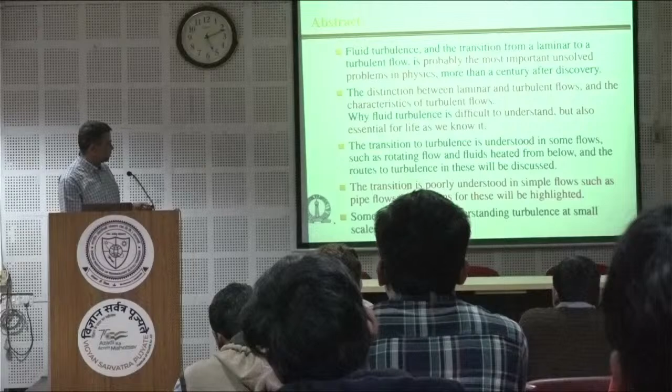What I'll try to accomplish today is to say a small number of things: that fluid transition from laminar to turbulent flow is probably the most important unsolved problem in physics, more than a century after its discovery. We still do not understand well the distinction between laminar and turbulent flows, and I'll try to tell you why it is difficult to understand, but more importantly, why it is essential for life as we know it.

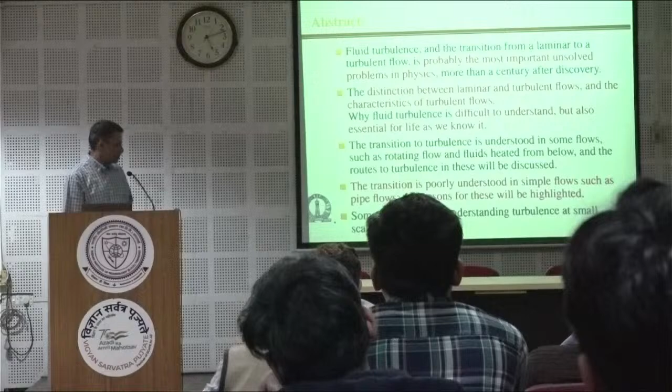There are some flows for which we understand that the transition starts from an instability, and there are certain routes to turbulence. But for flows that are common every day, the transition in pipe flows, for example, is still poorly understood. There are reasons for this, and I'll go through that - more as a motivation for you to join in and try to solve this difficult problem in your own ways. I'll discuss some of our work at the end.

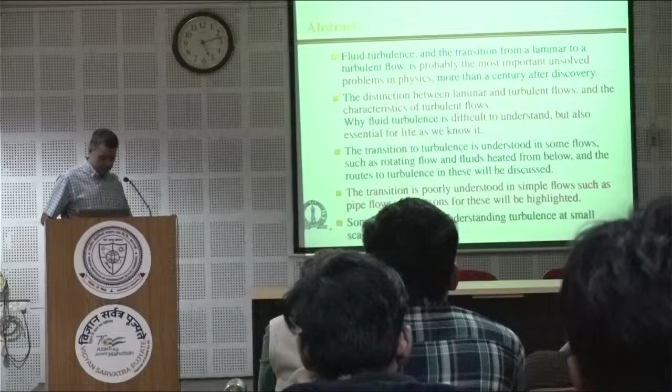So transition is something we see every day. We see it when you open a tap - at the top there is a nice laminar flow with smooth streamlines, and at some point it breaks up into a turbulent flow.

If you open it further, you see that the flow is chaotic with velocity fluctuations in all directions. This transition happens spontaneously. There's no need for an external disturbance, no need for a continuous disturbance, to generate a turbulent flow.

You see it in water, you will see it in air as well. At low velocities, the smoke is like a straight wisp, and then it breaks up into turbulence. It's seen in all large structures. So I'll try to explain laminar and turbulent flows, what turbulence is, and why we have turbulence.

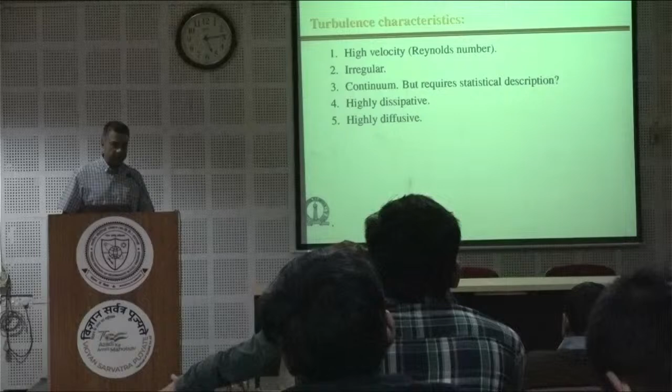Turbulence has various characteristics. It happens primarily at high velocities, measured by the Reynolds number, and it's highly irregular. The point is that turbulence is still a continuum phenomenon, in the sense that you do not need a molecular description to get turbulence. So the smallest scales in turbulence are still much larger than the molecular scale. And it's highly dissipative and highly diffusive. I'll try to illustrate that.

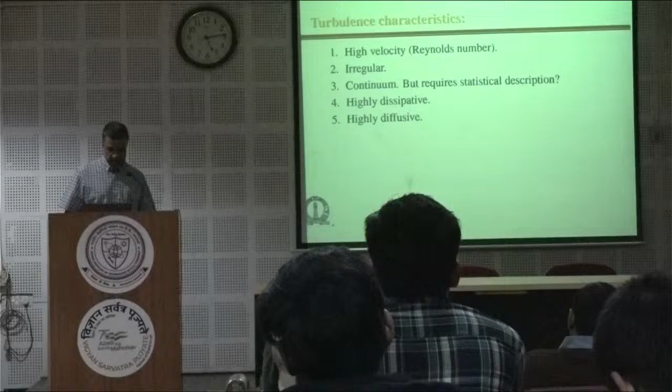If you take two plates and shear them past each other, the force exerted is directly proportional to the area, inversely proportional to the separation, and directly proportional to the velocity. If you write force per unit area, it has a constant times the velocity divided by the length. The velocity divided by the length is called the strain rate, and this coefficient is called the coefficient of viscosity. Using this coefficient of viscosity, you can make a dimensionless group called the Reynolds number.

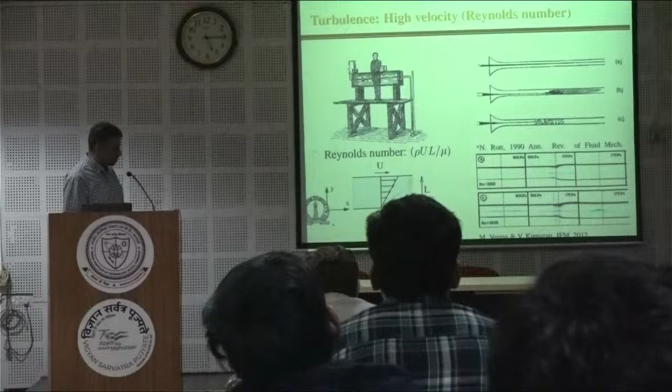When this exceeds some critical value, you get a transition to turbulence. This is shown here by experiments by Reynolds many years ago, where at low velocities you get a nice straight line. At some point, there is a discontinuous transition to a highly turbulent state. These are some pictures that we took in our setup that show the same thing.

The transition Reynolds number is usually in the range of 10 power 3 to 10 power 4 in most situations. It depends upon the configuration. But in all cases, you will get a transition from a laminar state at low Reynolds number to a turbulent state at high Reynolds number.

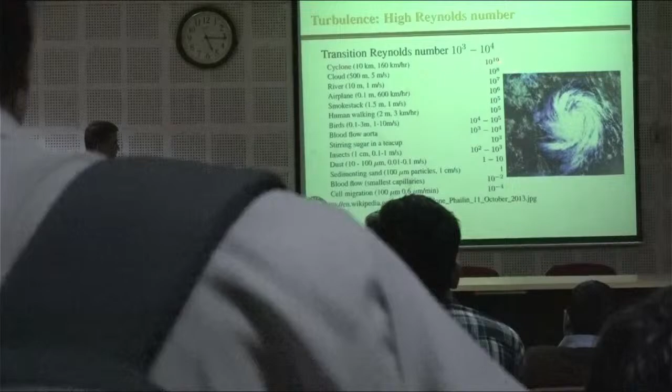In our everyday life, we encounter things of various Reynolds numbers. Starting from the large scale, cyclones going at 10 kilometers diameter and about 160 kilometers per hour have a Reynolds number of about 10 power 10 or so. Clouds and rivers, etc., have about 10 power 7, 10 power 8. What we usually encounter in airplanes is about 1 million or so.

Smaller things have smaller Reynolds numbers. If you walk around the room, the Reynolds number is about 10 power 5. Right now, as all of you are sitting, because of the temperature difference between your body and the surroundings, there is a thermal plume rising over your heads, which you cannot see because it does not interfere with light of any frequency. But if that plume did not exist, your body would not cool as fast, and you would not be able to do thermal management of your own body by physiology.

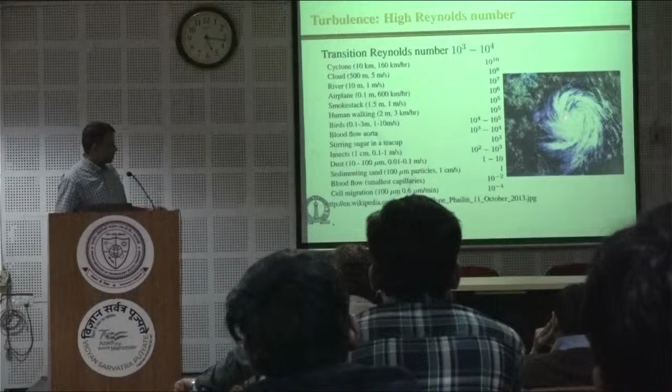A cyclone extending over 10 kilometers has a Reynolds number about 10 power 10. The clouds around us are about 10 power 8. Rivers are about 10 power 7. Airplanes are about 10 power 6. Most of you would have been in an airplane. What you would not realize is that this causes structures much larger than the plane itself when it flies, and there are still smaller structures and so on.

Because the turbulence generated by the previous one can significantly affect the safety of the one that follows. Okay, so this is smoke. And those of you who can see will notice there are smaller and smaller structures in all of these. So it's not just one large flow, you're seeing smaller and smaller flows within it.

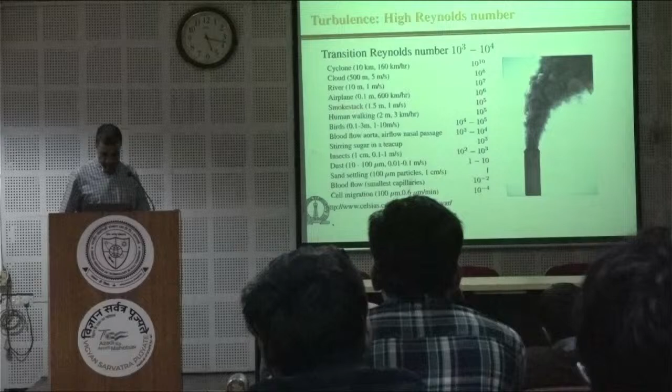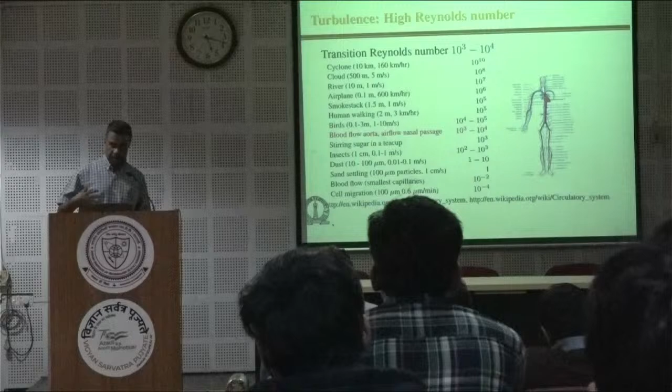Similarly, in human walking, as you walk around, you're generating a turbulent flow. Birds too. This is for blood flow, cardiovascular flows. In the largest aorta, it's about 10 power 3 to 10 power 4. And this is a very good indicator of cardiac health, for example. They make it out by the sounds generated as the blood is flowing through, and there are certain sounds that are signature of turbulent flows.

So stirring in a teacup, and then down to insects and so on, down to cell migration. All the red are actually turbulent flows. Anything about our size or larger will be mostly a turbulent flow, unless the fluid is very viscous and so on. Things much smaller than us are typically laminar flows. And then there are transitional flows over here, which are important for a reason I'll come back to.

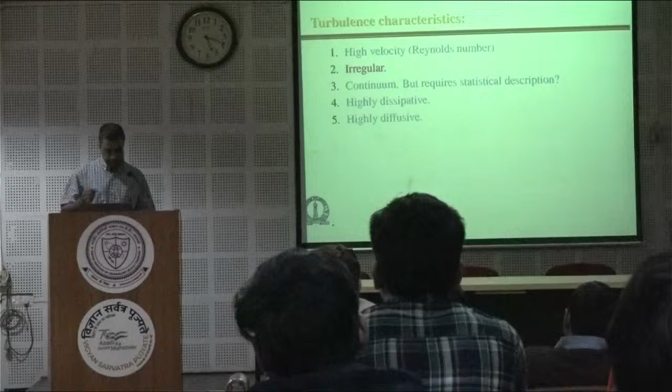So it's highly irregular. You can see there is a range of eddies in this. As I showed you with the smokestack, there are large scale structures and there are smaller scale and smaller scale still. This has been realized for some time now.

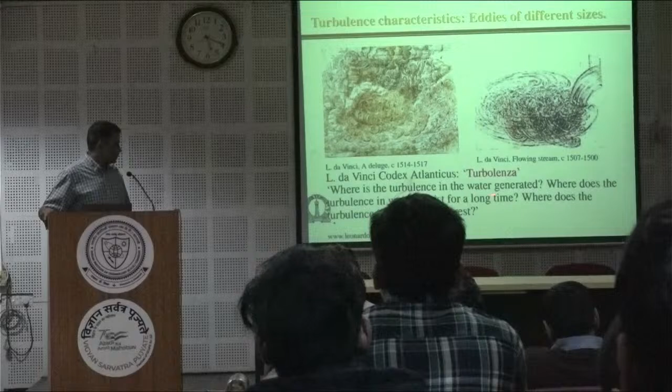Da Vinci was probably the first one to put it in words. Where is turbulence in water generated? Where does the turbulence in water persist? Where does it come to rest? And you can see the paintings he drew, you can see smaller and smaller structures in these paintings, drawn in the 1500s.

There is a theory due to Kolmogorov which says that the smallest scale in a turbulent flow goes as the Reynolds number to the minus 3/4 power times the large scale. What that implies is that if you do this calculation, Reynolds number to the power minus 3/4 times the large scale, which is about 10 kilometers, you get a small scale that's less than a millimeter. So in that large cyclone swirling around, extending over tens of kilometers, the smallest little eddy of fluid actually present is less than a millimeter.

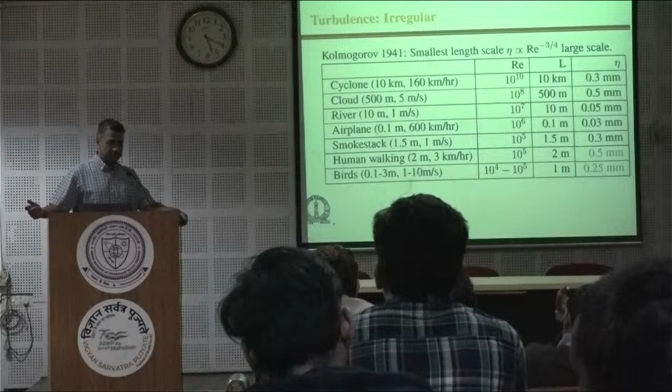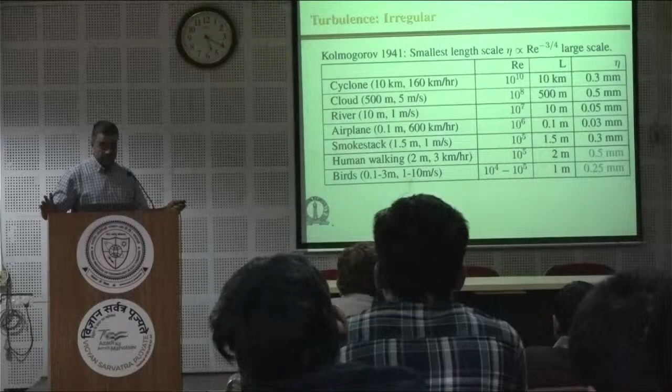And this smaller scale is remarkably insensitive to what the large scale flow is. It's roughly 0.03 to 0.3 millimeters, regardless of the large scale flow, whether the Reynolds number is 10 power 5 or 10 power 10. And that is important. So the flow organizes itself such that the smaller scales are roughly the same length scale. However, this 0.3 millimeters is still much larger than the molecular scale.

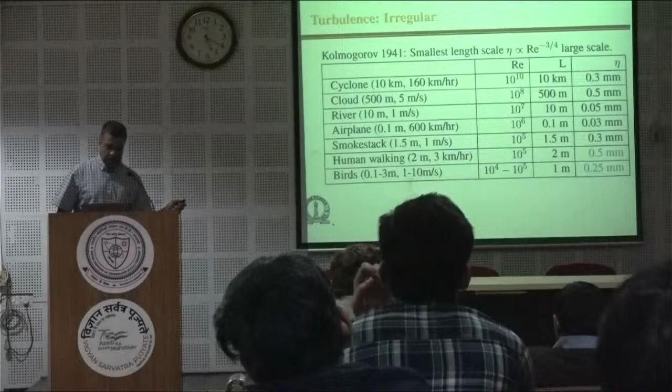That's what I was telling you in the beginning. Therefore, turbulence is actually a continuum phenomenon. It can be well described by continuum equations. You do not need a molecular description, but it requires a statistical description. Let me try to explain that.

So if you write down the Navier-Stokes equations for any complicated shape, complicated flow, you would think that you can just take the average of these equations to get an equation for the average velocity. That is not true. We can do these simulations even for very complicated systems, but we still cannot get a description. And the reason is the following.

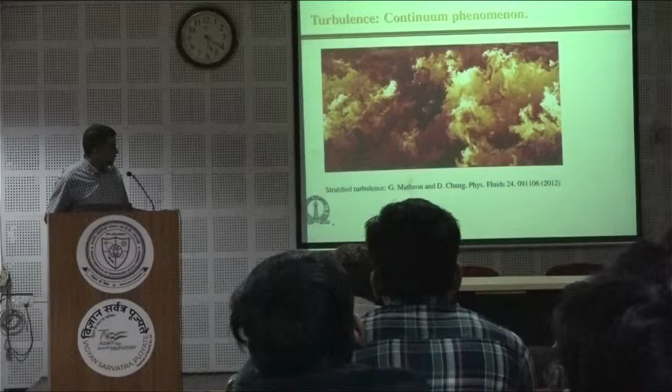Let me try to explain that. Our simulations can actually bring out very, very sensitive features, down to very small scales. But the question is whether being able to simulate something is the same as understanding it. In the case of turbulence, it is not, and the reason is as follows.

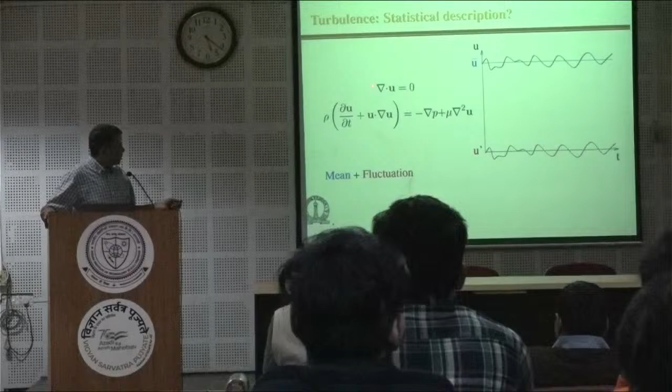Simplistically, you would think that they have some fluctuating velocity at some location. I can separate it into a mean part plus a velocity fluctuation. The average of this fluctuation is equal to zero. So then I know what the equations are, they are continuum equations, these are well established. And I can think of just taking the average of this equation to get an equation for the mean velocity, and just go ahead and solve it. It doesn't work out. The reason is because you have this term that is quadratic in the velocity.

If you have a fluctuating quantity, the average of the fluctuating quantity is 0. But if you try to take the average of the square, that is positive, so that is non-zero. So even though the average of a quantity, or the average of two quantities, may be 0, if you multiply the two, that average is not 0. So the fluctuations actually enter into the equations for the mean flow.

That is the fundamental problem of turbulence. It's called the problem of closure. You cannot close the equations at any stage, so you're left with trying to make some models for these nonlinear terms. And it turns out that nobody has been able to figure out a general model. You can have specific models for specific flows, but you cannot get a general model that will work for all flows.

That is the turbulence problem, and this has been realized all through history. I put some quotes here from very old sources. One says: I had less difficulty discovery of motion of heavy bodies in spite of their distances than the investigation of the movement of water before my own eyes. He's basically telling that the turbulent flow of water cannot be described by equations as cleanly as the motion of planetary bodies.

And there is this quote due to Heisenberg: when I meet God, I will ask him two questions - why relativity and why turbulence? And I really believe he will have an answer for the first. And this has a history to it.

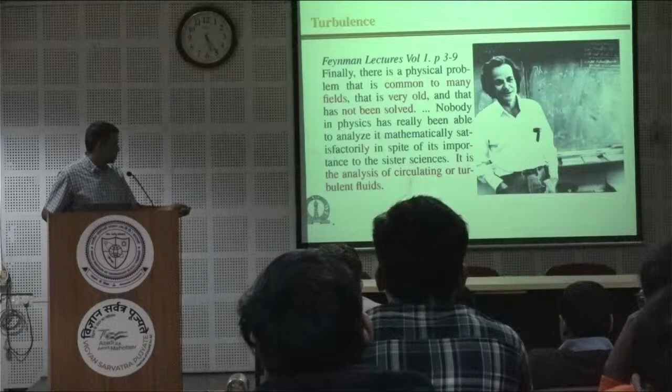And those of you who studied physics from Feynman lectures, everybody reads the chapters, not many people read the preface. But if you do read that, he says there actually that finally there is a physical problem that is common to many fields, very old, not been solved. Nobody in physics has really been able to analyze it mathematically satisfactorily, in spite of its importance to sister sciences. It is the analysis of the circulating or turbulent flows. This is there in the foreword of the book, and then of course in the rest of the book he doesn't talk about turbulent flows at all.

So I said that there's a range of length scales for motion in a turbulent flow, all the way from the large scale spanning the system down to smaller and smaller scales. The smallest scale was the estimate I'd given you by Kolmogorov. It is not exact, but it's a scaling estimate, and that shows you that the small scale could in many cases be 5, 6, or 8 orders of magnitude smaller than the large scales in a turbulent flow.

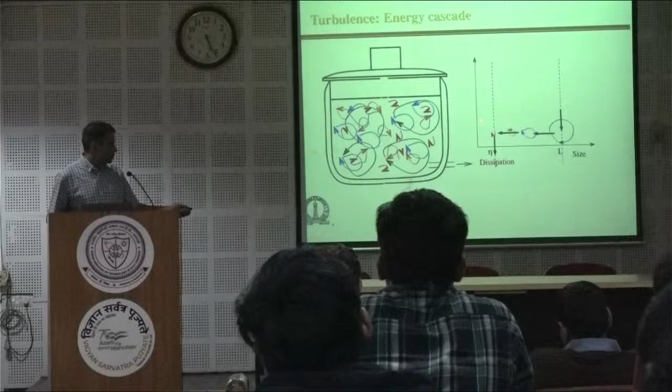What is happening is that energy is being fed in due to whatever was generating the flow. In a cyclone, for example, that will be the pressure difference generating the flow at the large scales, and then it is transmitted through a series of length scales down to the small scales, until it reaches a scale where the Reynolds number based upon this scale is roughly order 1, so that inertial and viscous effects are comparable, and there it gets dissipated. That is the basic principle of a turbulent flow.

And we can get kinetic energy and dissipation rate and so on. We can get estimates of these as a function of length scale.

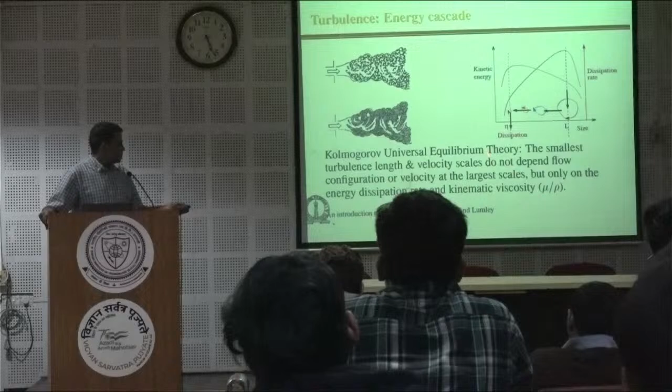The idea here is that the smallest length and velocity scales do not depend upon the configuration or the velocity at the large scales, but only on the energy dissipation rate and the kinematic viscosity. So basically, if I have a flow and I make the fluid less viscous, the small scales will become still smaller.

That's the idea of a turbulent flow. Turbulence is a flow property, not a material property like viscosity. And that is what makes the problem complex, because if it is a flow property, then it will be different for each kind of flow. You cannot take what you learned from one kind of flow and apply it directly to another. That's where the problem is.

This energy cascade has been seen. Da Vinci himself said that the smallest eddies are almost numberless, and large things are rotated only by large eddies and not by small ones, and small things are turned by small eddies and large. Basically, in 1500, he is saying that the large scales generate the energy, and then that goes through the small scales.

Just by looking at a turbulent flow, they didn't have the mathematics at that time to do anything, but just by looking at it. So it's a remarkable observation, and it highlights the importance of observing things in solitude, instead of running around trying to write equations or do an experiment. That's where the thought process starts.

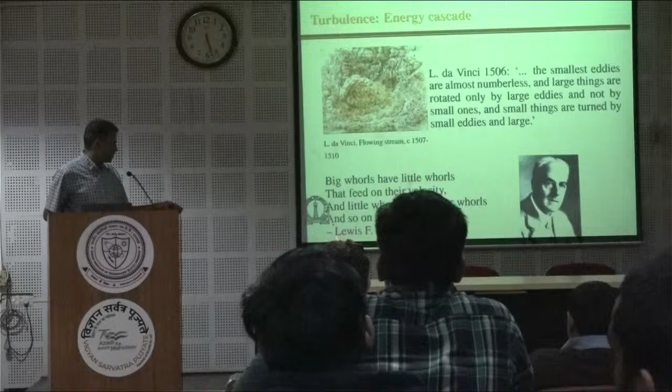There have even been poems composed by Richardson on this. Richardson is the one who gave the mechanism for the large scale flow in the Earth's atmosphere.

It's also highly dissipative, so the dissipation rate in a turbulent flow is much higher than what it would be in a laminar flow for the same flow configuration. That is the reason that for pumping of fluids and so on, we require much higher energy than you would simplistically calculate from a laminar flow. The energy requirement can be 2-3 orders of magnitude higher.

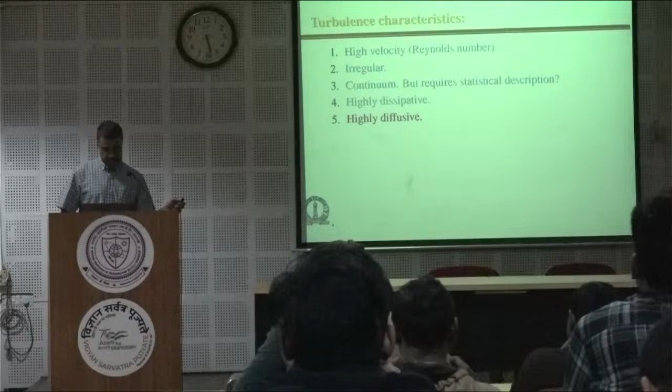But it's also highly diffusive, and it is for this reason that it is extremely important. Let me explain that.

Molecular diffusion is due to the random fluctuating velocities of the molecules, the thermal velocities, which depend upon equipartition of energy. It's square root of kT by m, the molecular fluctuating velocity. It's also roughly the velocity at which sound transmits in gases. So diffusion takes place because a molecule is randomly moving within a fluid, and if you wait long enough, it will sample all of the space, in contrast to a solid where molecules vibrate about fixed positions.

This molecular diffusion coefficient has dimensions of length squared per unit time, because it's the distance squared divided by time. If it were going in a straight line, the distance would be proportional to time. If it is diffusing, the distance is proportional to t to the half. The ratio of distance squared divided by time is the diffusion coefficient, and it scales roughly as the speed of sound times the microscopic scale—molecular speed times the persistent length of motion. You can calculate this.

So for air, it is about 10 power minus 5 meters square per second. For water, it's about 10 power minus 9. These are important numbers, kindly just keep it in mind. For air, the diffusion coefficient is 10 power minus 5 meters square per second. For water, it's about 10 power minus 9 meters square per second.

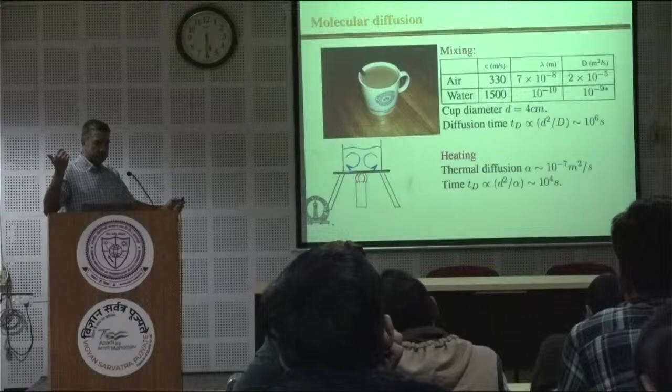Similarly, the thermal diffusion coefficient corresponds to about 10 power minus 7 meters square per second. So if you wanted to cook something in a vessel, and if you relied only on diffusion to do it, it would take you about 7 to 8 hours. And we cannot, of course, wait that long. So that is why turbulence comes in.

In turbulence, the diffusion time depends upon the eddy length scale and the eddy velocity, not the molecular length scale and the molecular velocity.

For a cloud, for example, Reynolds number is 10 power 8, and this is about 500 meters. That's the reason the diffusion time—if you waited for molecular diffusion, you would take about 2.5 times 10 power 10 seconds for the moisture in a cloud to mix and seed and create raindrops. Because of turbulence, it happens in about 10 power 2 seconds, about a minute or so. That's the reason clouds form over a reasonable time scale so that we get rain and can grow our crops and all that kind of stuff.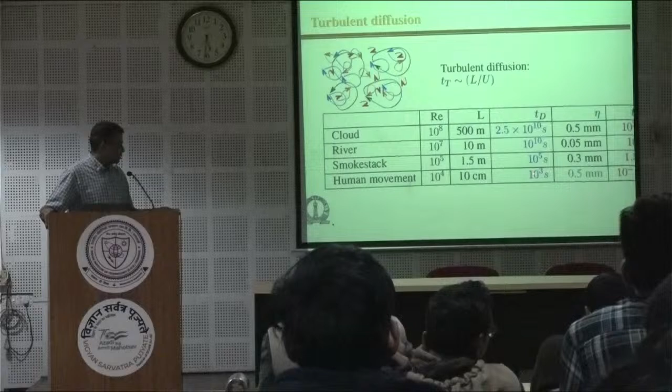Similarly, if you waited for mixing in a river, it would take about 10 power 10 seconds, whereas it takes about 100 seconds for it to mix. Similarly, for smokestacks, 10 power 5 seconds is what it would take, and 10 power 3 seconds is what it would take for human movement, whereas this is about 10 power minus 1 seconds.

So mixing at large scales takes place primarily because of turbulence. If you were to wait for molecular diffusion to mix things, we would not see processes as we know them. That's probably an anthropocentric answer to this question—why turbulence? Because life as we know it requires turbulence at the large scales. Let me give you some examples.

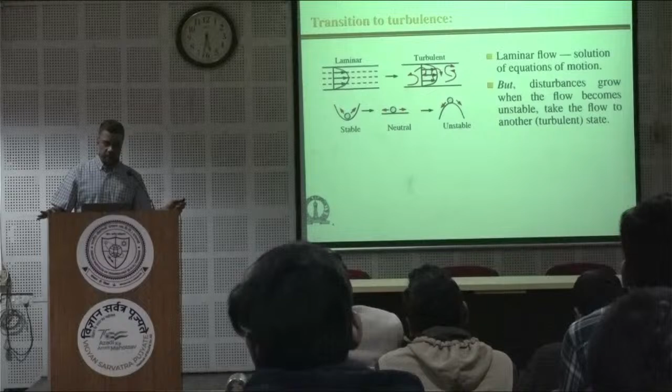Before giving you some examples, I'll discuss hydrodynamic stability and how we detect turbulence. The point is that if you have a flow in a pipe, for example, it's a laminar flow, and it spontaneously undergoes a transition to a turbulent flow. It is not that the laminar flow is not a solution of the equations when you increase the Reynolds number—laminar flow is still a solution of the equations.

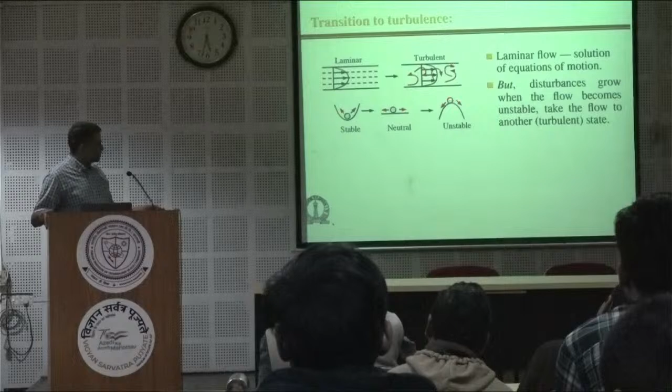We detect this by doing what is called a hydrodynamic stability calculation. Many faculty here have done fine calculations on hydrodynamic stability in various contexts. Normally, we use what is called a normal mode analysis—that is, we expand this disturbance in terms of a series of disturbances which we know can be summed up or linearly superposed to get a disturbance of any shape. Then we examine each one of these disturbances, and if any one of them is unstable, we know that the transition has taken place.

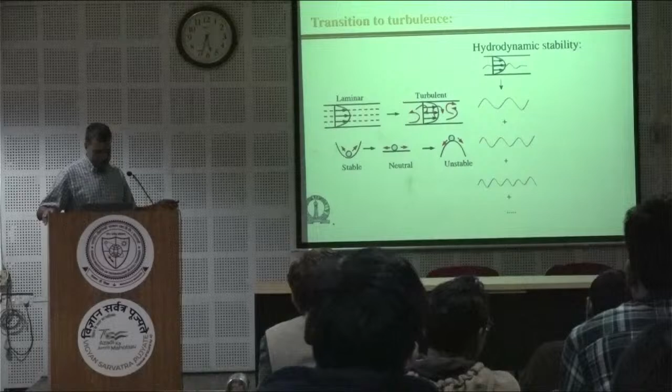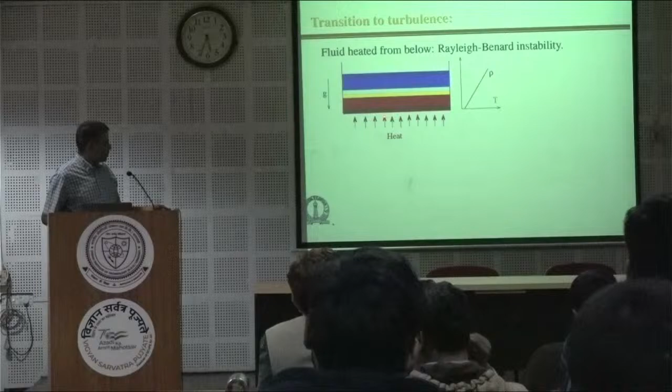That is the kind of thing that is done, for example, for heating from below. The reason you're able to cook food is because when you heat from below, the fluid at the bottom is hotter, top is colder. So the bottom, because it's hotter, is lighter; the top, being colder, is heavier. So you have a higher density on top of a lower density. That is unstable, because if you reverse two volumes of fluid, you will get a net decrease in the energy, since the heavier fluid has come down and the lighter fluid has gone up.

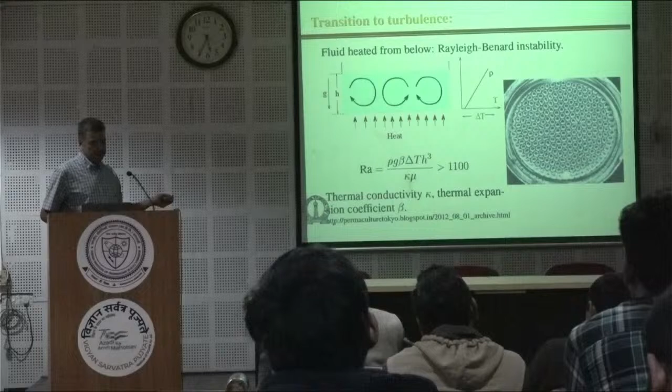Because of that, you get spontaneous convection rolls, and you can see these over here. You heat it further, it becomes turbulent, and that is what you see as boiling and so on in a vessel. This is the reason you're able to cook in 15 or 20 minutes, whereas if you waited for heat conduction, it would take many hours, half a day, something like that.

This is also important in the atmosphere. The reason is because in the lower atmosphere, the temperature actually decreases with height. So you have hotter fluid below and colder fluid above. Hotter air has a lower density, and colder air above has a higher density. Because of this inverse temperature gradient, you spontaneously get circulation patterns.

These circulation patterns are responsible for the formation of clouds and so on. Those who have gone in a plane will know that they go up to a height of about 32,000 feet, and they'll announce we are flying at 32 or 29,000, something like that. The reason they do that is because at this particular height, there is no longer a reverse gradient. The temperature beyond this point increases.

That is stable, and therefore you have less turbulence over there. So planes fly above the turbulence by going to a height where the temperature decrease stops, and the temperature starts increasing again. But this temperature decrease is actually important for the formation of clouds and so on, because without that circulation from the oceans, you won't be able to get clouds. At that height of 32,000 feet is where all the clouds are. If you go slightly higher, the gradient is the other way.

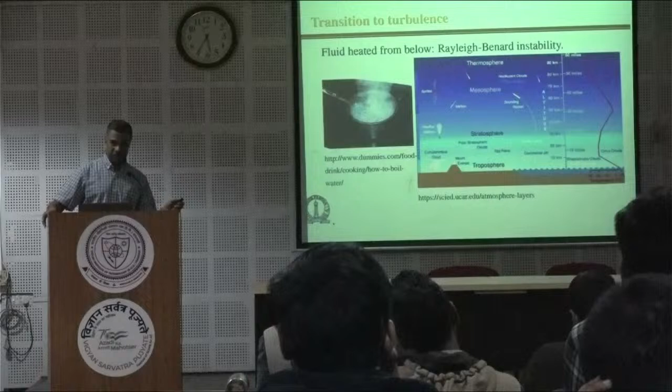So it's stable, that's why you fly above clouds, because below clouds you have turbulent flow. Without this temperature inversion and without the hydrodynamic instability, you would not have processes that make the temperatures around us reasonably comfortable. I mean, of course it does get very hot and very cold, but without the circulation pattern, it would be much hotter and much colder than it is today.

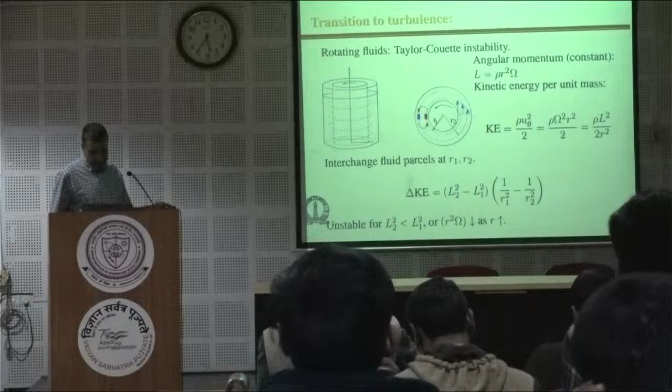Similarly, for rotating fluids, it's a similar thing. It's called the Taylor-Couette instability. When you rotate an inner cylinder faster than an outer cylinder, so that the velocity inside is higher than the velocity outside, that is unstable because if you interchange two parcels of fluid, the centrifugal energy decreases. Because of that, this undergoes a spontaneous transition to form circulation rolls. You get rolls that look like this.

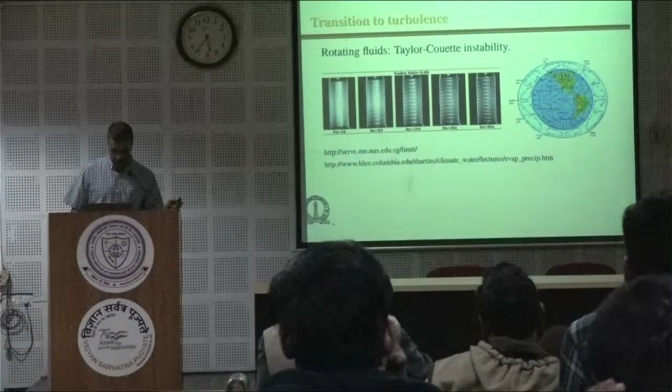This mechanism is also responsible for the circulation pattern in the atmosphere. These circulations that you see in the atmosphere, which transfer energy from lower to higher latitudes and vice versa, depend upon this instability and the turbulent flow at large scales. That is the reason the Earth's atmosphere is so favorable for us.

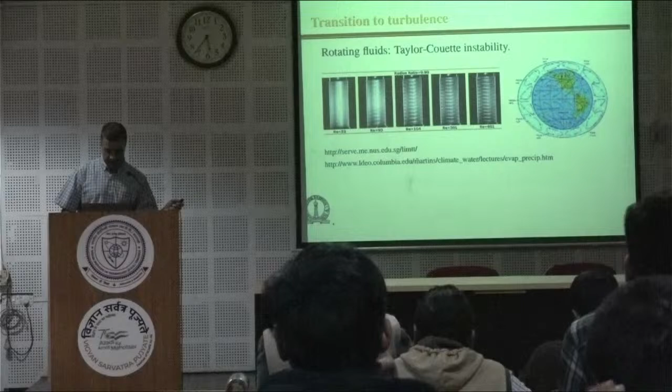So I've given you some examples of why we depend upon turbulence, and those were cases like the Taylor-Couette and Rayleigh-Benard instability, where we could actually predict it using a hydrodynamic stability analysis. These are cases where we still do not know how to predict it. They look simpler, like channel flows and pipe flows, but we still do not have a way of theoretically predicting turbulence in these cases.

Part of the reason is that there's a transition that takes place, where it goes from this kind of behavior to this kind of behavior. So if I put a disturbance of amplitude greater than this value, any small disturbance will spontaneously grow to this other state, and then the landscape further evolves. If I put an amplitude of disturbance, I'll go to some other state.

These are cases where that is not valid. So it goes from something like this to something like this. If you put an infinitesimal displacement, you will see that it will come back to the same state, so you'll predict that it is laminar. But actually, if you put a disturbance with amplitude larger than a certain value, then it goes to some other state. It's called a subcritical transition.

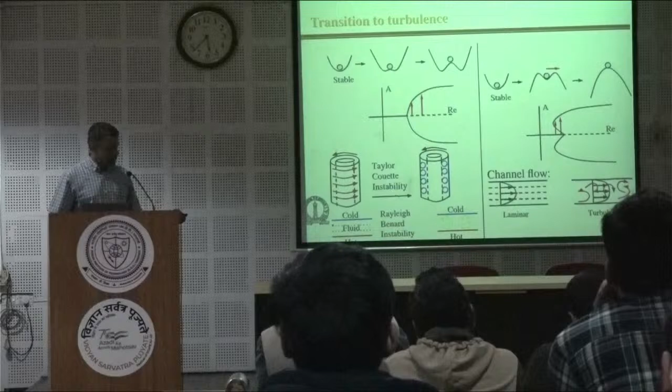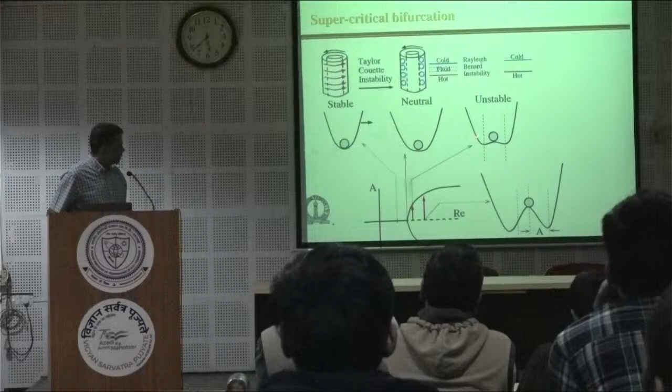That is the reason the turbulent flow in a channel is still not predicted. The landscape sort of looks something like this. You get this kind of behavior for Rayleigh-Benard and Taylor-Couette instabilities. But actually, for a channel flow, you never get this state. You get to this state and this state, but you never get to this state.

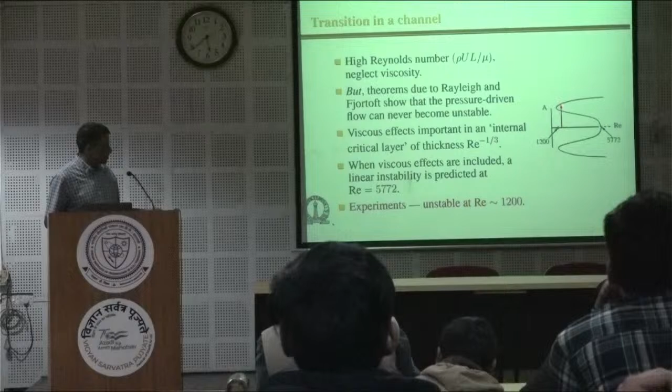For a channel flow, the best experiments and theoretical predictions give you a Reynolds number of about 5,700. Experiments repeatedly show that its transition takes place at 1,200, and this discrepancy has never been satisfactorily explained. The best explanation we have so far is that there is a transition boundary that extends all the way to 1,200, and any small disturbance in the experiment will reach you to this turbulent state. The situation is actually worse for a pipe flow, where analysis predicts that the flow is always stable.

Yet repeatedly we get transition to an unstable flow at a Reynolds number of about 2,100, and the transition is considered to be due to finite amplitude disturbances. We can maintain laminar flow even at 10 power 5 if you take care to dampen out disturbances. So that is the situation for a pipe flow.

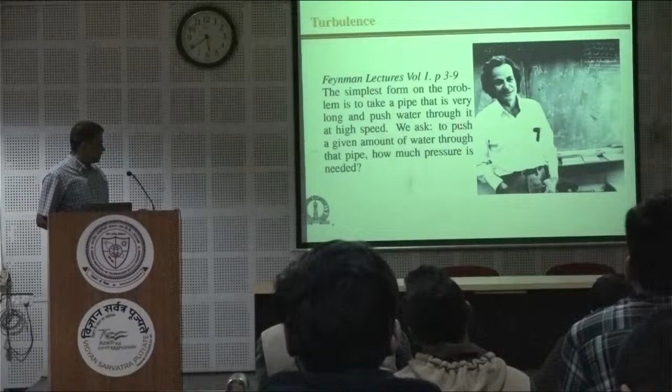This is actually from Feynman's book. He said the simplest form of the problem is to take a pipe that is very long and push water through it at high speed. We ask to push a given amount of water through the pipe, how much pressure is needed. He says that is the central problem which we ought to solve someday, and we have not. So this has been recognized for a long time.

But we can get reasonable results by just simulating the whole thing. Computational resources have advanced sufficiently that we can simulate the whole thing for reasonable values of the Reynolds number, not for the very large scale. But then simulation is not the same as understanding, and the central problems still remain.

So as I said, we see turbulence at the very large scales, and this has been used in practical applications. The classic example is this Trans-Alaska pipeline, which goes for 800 miles and 4 feet in diameter, and to actually reduce turbulence drag, about 2 million barrels of oil per day goes through.

They add small amounts of polymer, and that can reduce drag by about 40%. So by just trial and error, we know a fair number of things about turbulence, but we don't have a central answer to the phenomenon itself.

So I'll just touch upon a few things that we did in this field. Soft channels and tubes is an area that I worked on for some time. As you can see, these are present in cardiovascular flows and so on. They are also present in small scale systems, microfluidic systems that are used in, for example, point of care diagnostics.

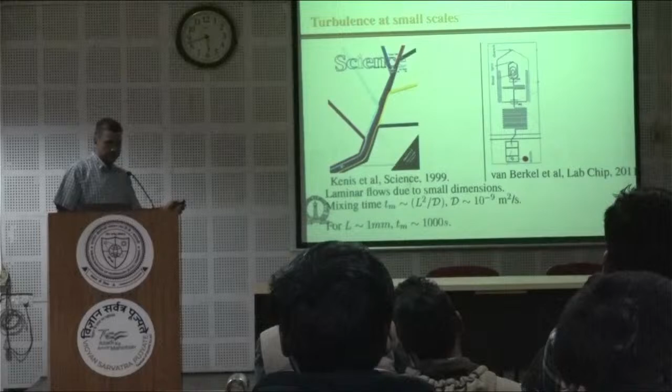The reason you require that long channel is because you have to wait sufficient time for it to mix by molecular diffusion. But there's a cost to be paid, and that is you have to apply an extremely large pressure drop. This is one of the things preventing the actual commercialization of these kinds of devices, because the pressure drop required for laminar mixing by diffusion over long channel lengths is prohibitively high, and secondly, there's a significant chance of mechanical failure simply because you're applying such a large pressure drop.

So one of the things we were looking at was, rather than having a rigid surface, can we put some kind of soft material? If you put a soft material, for those who have done some basic dimensional analysis, there is one other dimensionless parameter that enters into the problem, and so a transition has to be a function of these two. These are soft materials with elasticity about 10 power 4 to 10 power 5 pascals.

So I'm going the other way. Yeah. Okay.

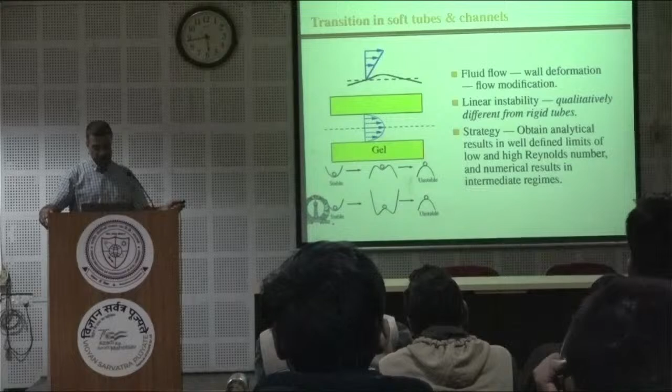Our analysis actually showed that this transition is due to a linear instability, whereas the transition in a pipe, as I told you, cannot be captured by a linear stability analysis because it is highly subcritical. This case turned out to be one that a linear stability analysis can capture.

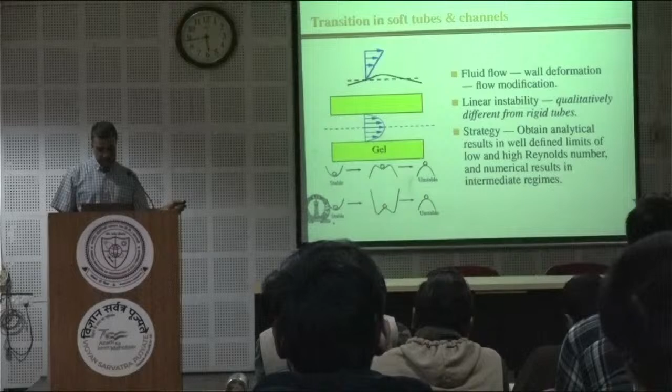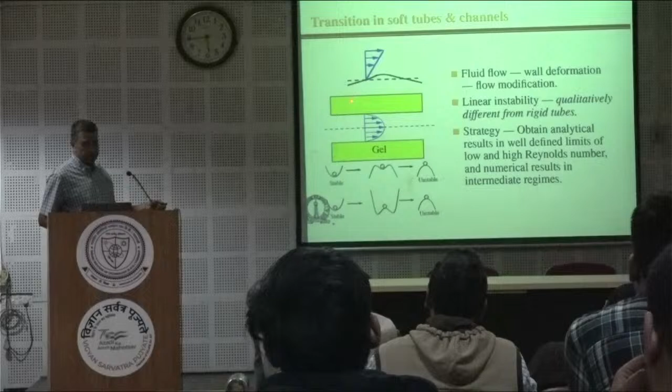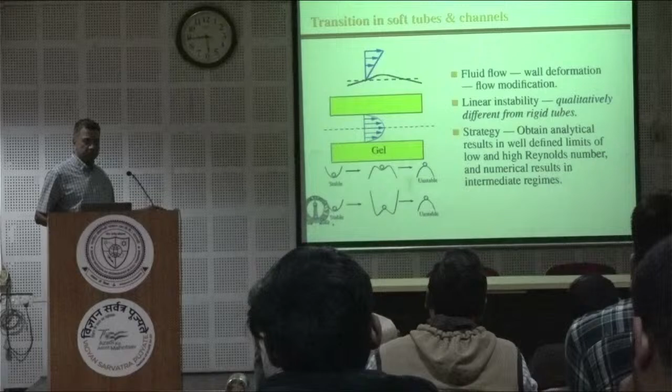The mechanism was that if you deform the interface, the shear velocity at the crest and the shear velocity at the trough are different. That difference in shear velocity exerts a torque that tends to destabilize the surface. This mechanism is not present in a rigid tube because you cannot deform it, so you have mechanisms of instability that are qualitatively different from what you'd have in a rigid tube. Putting a soft surface is not just a quantitative modification of the rigid tube instability.

So is this seen in experiments? We fabricated some experiments, once again at very small scales. I told you in the beginning that flows at our size are turbulent and flows much smaller than us are laminar. So the question was to see how low we can go, where we can trigger a transition to turbulence to enhance mixing in these kinds of small scale devices.

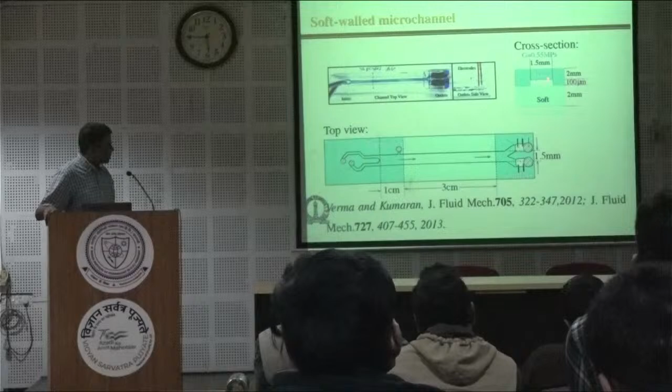This was a channel where we had made a shear modulus of about 0.55 megapascals on three walls and made the fourth wall very soft. This channel was a rectangular bore within this gel block. The width was about 1.5 or 1 millimeter, and the smallest dimension, the height, was 100 microns—that's actually the thickness of a human hair. That is the size of the smallest dimension.

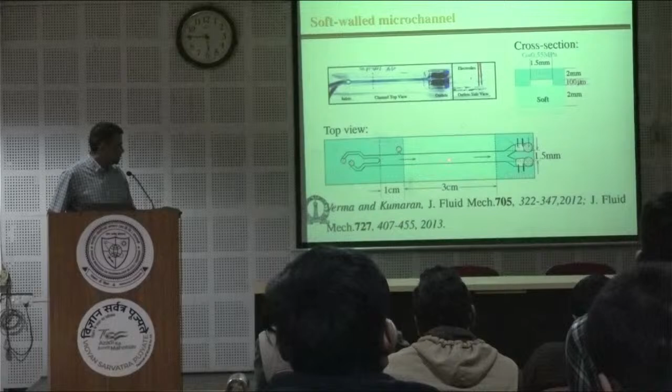We inserted fluid at two ends, with a development section where all four walls were made of rigid material, and then a test section where one of the walls was made of soft material. And this is what we see.

If we inject black dye on one side and clear fluid on the other, initially it is laminar throughout, with no mixing between the two streams. When you go to a Reynolds number of about 200, you see intense mixing across. This is over a channel that's about 3 centimeters in length, about 1.5 millimeters in width, and 100 microns in height, at a Reynolds number of 200, whereas for the rigid channel the transition Reynolds number is about 1200.

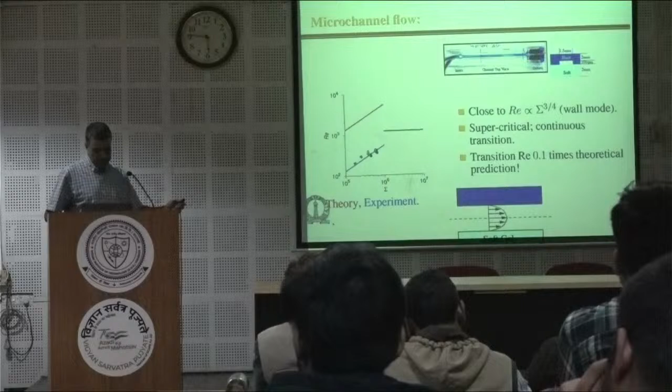Then we compared experiments and theory. The experimental points were over here, this is the rigid channel transition, and our theory predicted this. You can see there's a difference by an order of magnitude or so. This happens whenever you compare experiments and theory, so then you have to go back and figure out why there's a discrepancy.

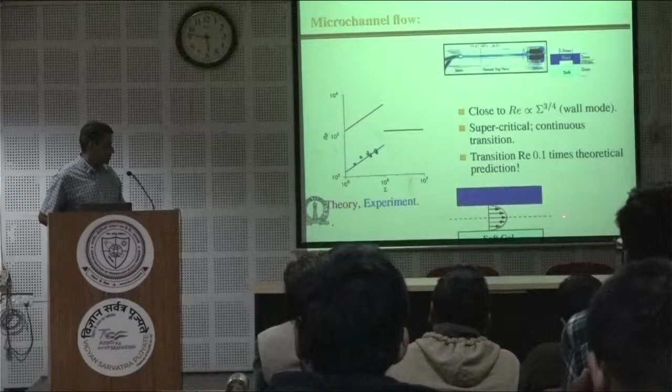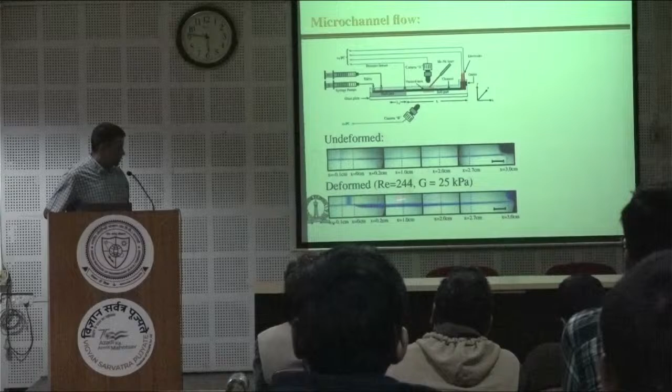The discrepancy arose because, like all good theoreticians, we had assumed in the theoretical analysis that the channel was rectangular, the flow was parabolic, and the channel walls did not deform. But when you apply a pressure drop across a soft gel wall, you see there's significant deformation at the bottom. So you have to go back and redo the calculations.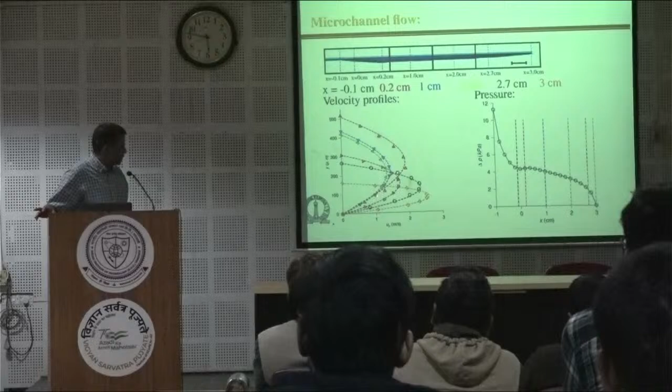We got the shape of the channel from the experiments and recreated it in simulation software with cross-sections at different locations. What you find is that the flow is no longer parabolic—it varies with downstream distance. The pressure gradient is no longer linear as it would be for laminar flow; there's a sharp drop at the expansion region, then a slow decrease further down.

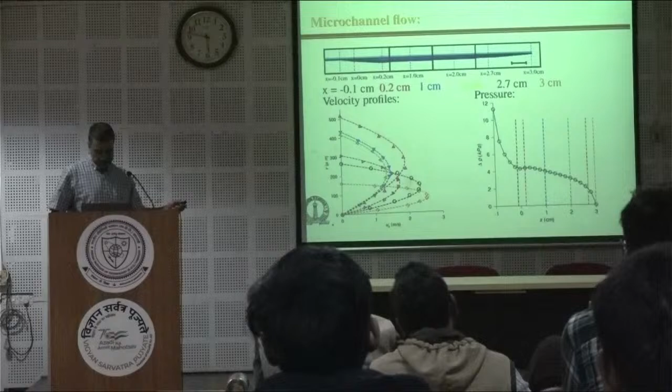If you put all this together and once again do the linear stability analysis, using the local velocity profile and pressure gradient with a parallel flow approximation, the instability is first predicted at the downstream converging section, not at the upstream diverging section. That is exactly what we saw in the experiments as well—the transition takes place downstream first, not at the upstream section.

And if you now plot the transition Reynolds numbers from theory and experiments, from different methods like dye stream, wall oscillations, pressure drop, and so on, now you see that's a very good match.

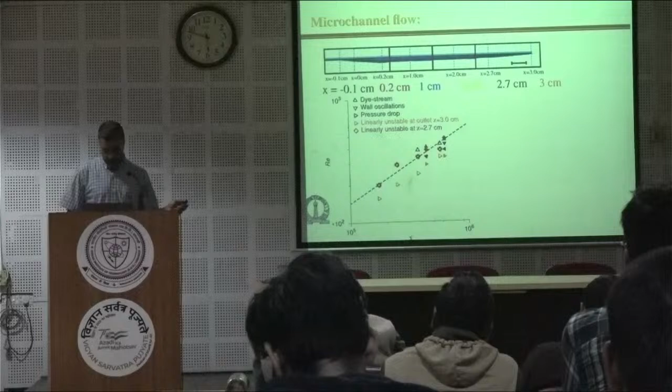Okay, so I'll end my talk here. This was the abstract that I put up in the beginning.

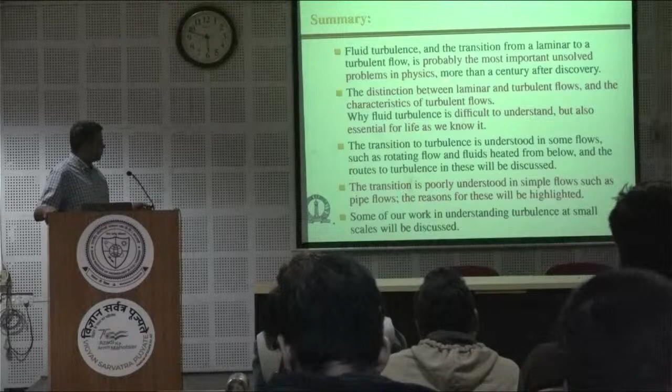What I had said was that fluid turbulence and the transition is probably the most important unsolved problem, more than a century after discovery. I tried to give you an idea of the distinction between laminar and turbulent flows and characteristics of turbulent flows, and why fluid turbulence is difficult to understand, but more importantly, essential for life as we know it. I showed you that in some cases we understand why the transition takes place. We still do not have a good understanding of the flow after transition, but we understand why the transition takes place and why there are routes to turbulence.

But there are flows for which the transition is still not understood. The simpler flows, pipe flows, channel flows, and so on, we still do not understand even the transition to turbulence, why it takes place. And the reasons for that will be highlighted. And some of our work on understanding turbulence at small scales, I discussed towards the end.

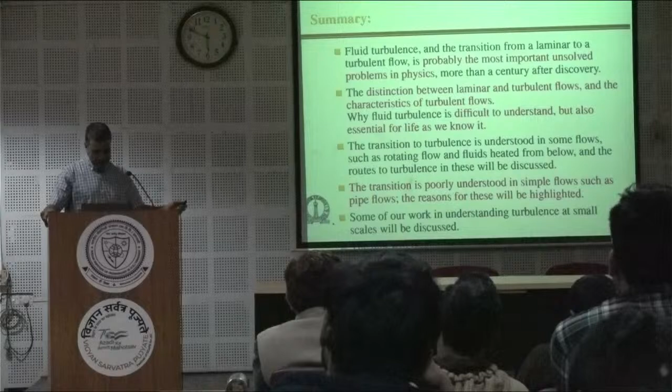There is a last line in the abstract which is not appearing here, and that is that the talk will be at the basic level, accessible to all. So that is something that you have to tell me. I'd appreciate your feedback on that, and I'll be happy to answer any questions. Thank you.

Sir, you were talking about Kolmogorov's scaling at the beginning. You say that the smallest length scale goes by the order of Reynolds to the power minus 3/4. So what does that eta actually mean? It is the smallest scale at which you have coherent motion of the fluid.

So is it like the smallest length scale of an eddy? Yeah, you can roughly think of it as the smallest length scale of an eddy. More formally, it is the length scale at which the Reynolds number based upon the length scale and the velocity scale of the eddy becomes 1. So both the inertial and viscous terms would be comparable at the small scale.

At the large scales, inertial terms are much larger than the viscous terms, which means the energy production rate, the rate at which you're pumping in energy, is much larger than the dissipation rate due to viscosity. That is why it gets channeled into smaller and smaller scales, until at the smallest scale, the rate of production of energy at the large scale is equal to the rate at which energy is dissipated by viscosity at that smallest scale. So the Reynolds number based upon that scale has to be 1. That is the formal definition.

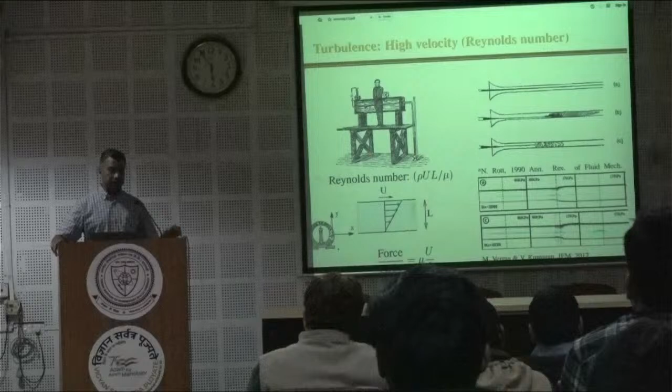It happens for a flat plate as well. If you go from laminar to turbulent flat plate, there's actually a discontinuity in the friction factor. That is because of the effect of the small scale eddies.

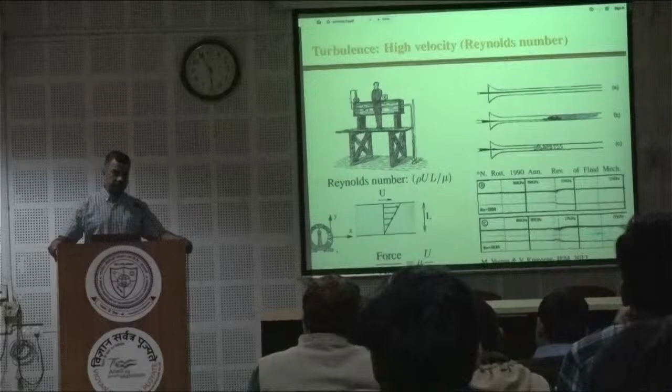So you have talked about the length scale, and so what about the time scale? Because that is also a very important parameter which will analyze the turbulence.

Yes, so actually there's length scale, time scale, and velocity scale, but two of them are related to the third one. In the Kolmogorov equilibrium hypothesis, all three of these depend only on two parameters: the energy input rate per unit mass and the kinematic viscosity. Once you have that, you can just do simple dimensional analysis and get it.

I think the time scale for the smallest eddies is about Reynolds power minus half times the time scale for the large flow. I think one is, and the third one is 1/4. But all three of those are obtained on the same consideration. The energy dissipation rate per unit mass has dimensions of mass, length square, T power minus 3, so per unit mass is length square T power minus 3. Kinematic viscosity is length square T inverse. So from those you can get only one length scale, one time scale - they're all related actually.

What is the physical mechanism behind the transition Reynolds number being affected by elasticity? What really happens at the interface between the soft material and the fluid?

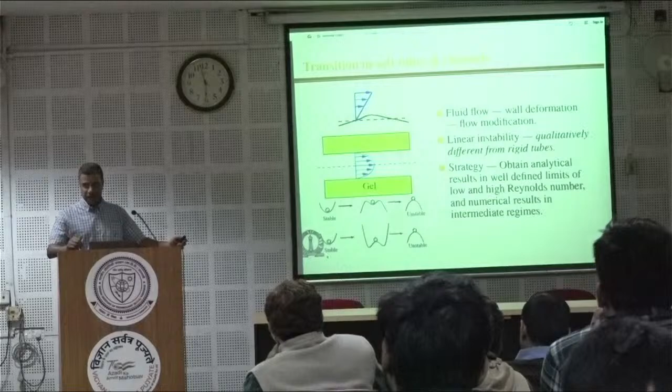In all of these interface problems, there's some discontinuity in the base state, velocity or something. So when you displace the surface, there has to be a fluctuation contribution to maintain continuity, and that is the same mechanism. Electric fields are also the same mechanism - some discontinuity at the surface. In this case, it's the strain rate, and in the earlier Kelvin-Helmholtz case, there's actually a difference in velocity. When one fluid is moving at a finite velocity and the other is stationary, there's a difference in velocity between the two. So if you generate a fluctuation, on one side the velocity is higher and the other side lower, so you have to generate a fluctuation to maintain continuity.

Is it something to do with flow over sand dunes? Suppose you have a sand dune, you have a similar situation. And therefore over sand dunes you have more turbulent flow than if it were flat sand? Sort of, except that those flows are at much higher Reynolds numbers.

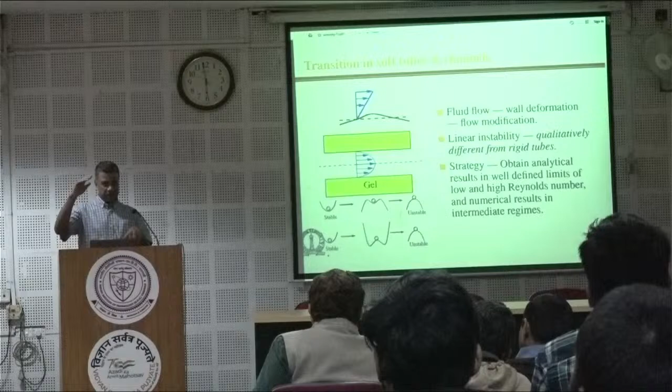So typically you use the Bernoulli equation. The cross section above the crest is actually lower than above the trough, so the flow velocity is higher there. When the velocity is higher, because of the Bernoulli equation, the pressure is lower. Pressure is higher at the troughs and lower at the crest, and that exerts a force that tends to amplify disturbances.

Is it similar to this type of instability? Not in that sense - it is not similar because the discontinuity we are talking about there is the pressure discontinuity. In this case, it is the velocity discontinuity, the strain rate discontinuity at the surface.

In case of the transition, are non-modal analyses helpful to capture the phenomena? So non-modal analysis - you've been doing it for shear flows, right? Yeah, so in this particular case, we didn't do the non-modal analysis, but as best as we could see, the normal mode analysis and the experiments were agreeing, so there was no real requirement for a non-modal analysis.

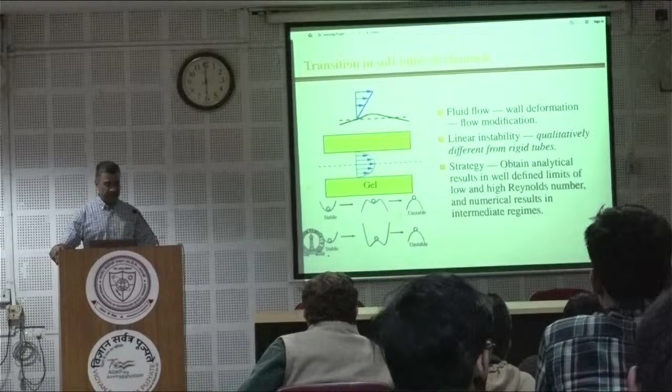All these analyses, people do when they're not able to get agreement. And as best as I know, the non-modal analysis only predicts that disturbances increase and then decrease again - it doesn't tell you about transition. My question is, in the non-modal analysis we are predicting something, and we don't have experimental results, so how can you make sure about these results we are getting? You have to see.

The problem is that any disturbance can be separated into a series of modal disturbances, and the same is true for non-modal. The only thing is, if you want to get it from experiments, the disturbance in the experiments has to be the same as the eigenfunction you're using in the analysis. That is very, very difficult. How do you tailor a disturbance in such a way that it mimics the eigenfunction you're getting from the analysis? That is where the difficulty in experimental confirmation is.

In any case, with non-modal analysis, ultimately the disturbance will decay. It goes very high, but then ultimately in a long time it decays, so it doesn't actually tell you about transition to turbulence. It just tells you what amplification will take place because of the projection of the velocity vectors of the eigenfunctions - some coherent type structures in the flow.

Coherent structures are basically the eigenfunctions you're getting - if you see something, you get an eigenfunction and then you call it a coherent structure. But the point is that you have to be able to put that disturbance in the experiment and then see what happens, and that is difficult. It's a good thing to try, but very difficult to do.

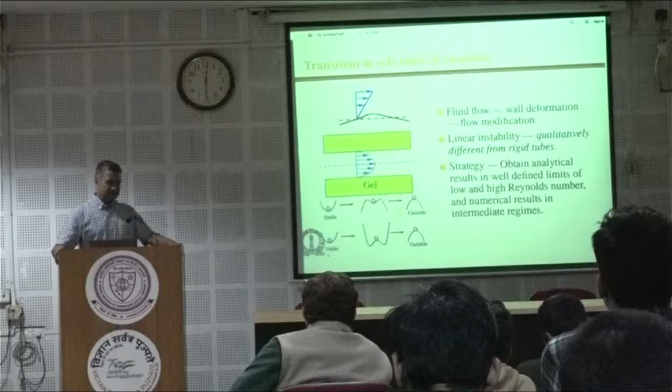These are all absolute instabilities, because we did temporal stability analysis. There are convective instabilities also, but when you go to very low Reynolds numbers, the convective term becomes small anyway. So the dominant instabilities at low Reynolds numbers are actually absolute instabilities.

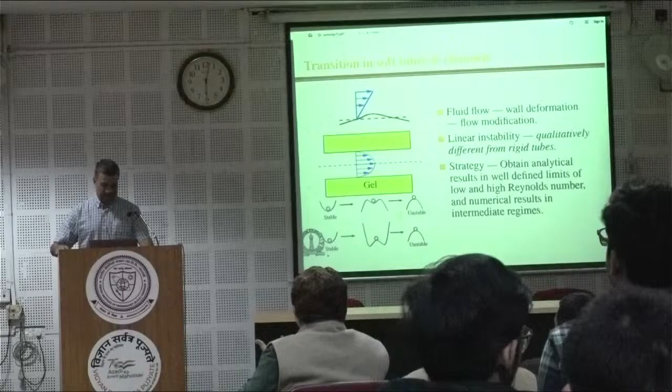You can close this, right? Okay.